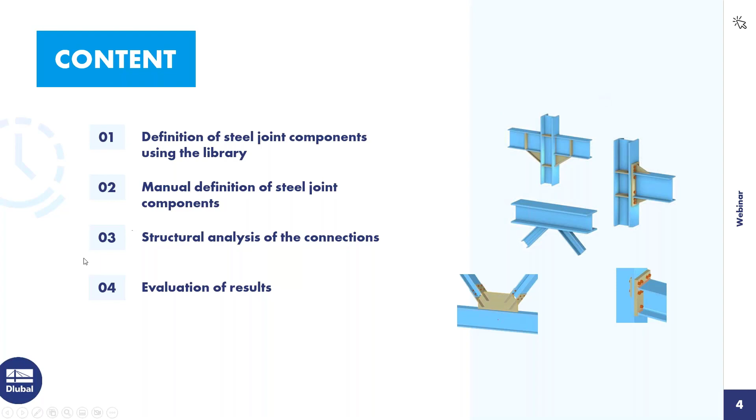Okay, then I turn to the program, RFEM 6. A simple model: a framework with frames in one direction and bracings in the X direction.

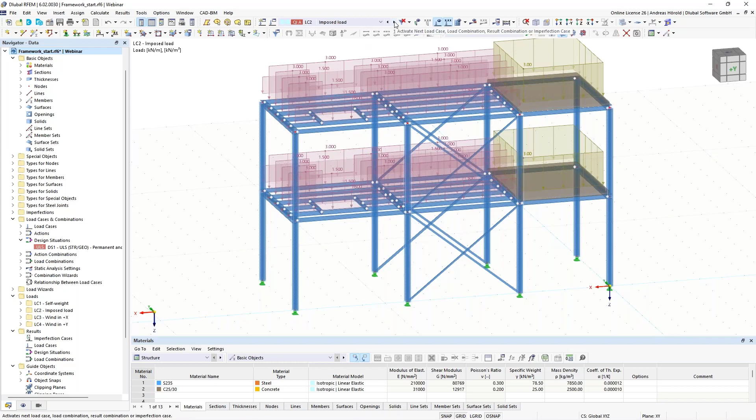We have got several load cases, for example the self-weight load case, the imposed load, and two wind load cases, one in X direction and one in Y direction. And we have got several combinations and a design situation.

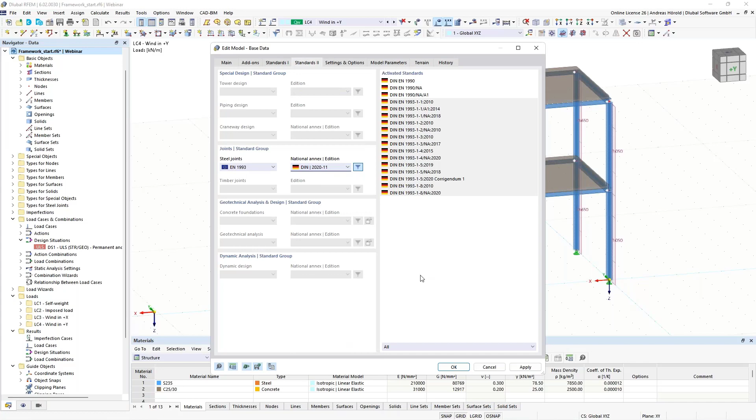So, to design the steel joints, I have to activate the add-on here, left above, under base data. I open the dialog, and under add-ons it's already activated—it's from my test. The standard is also already here for the load case classifications, the standard and national annex, in this case for Germany, for the steel joint design.

Then, once the add-on is activated, there are two new folders: the types for steel joints, for the creation of the steel joints, and at the bottom, the steel joints design, the design situations, and ultimate configurations. I will show you that component, the ultimate configuration, in the next dialog.

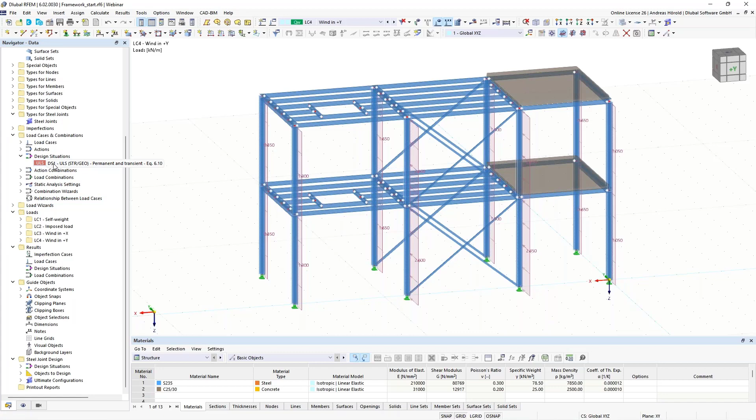But before I do that, I go to the design situations. You can see again the load cases here, the actions, and the design situation. It's important—if you activate the add-on, it's the default setting that the steel joints design is activated. Just note that it is here.

Okay, and then those are the action combinations and the load combinations, and those load combinations are included in the design situation. You can see that here in the overview.

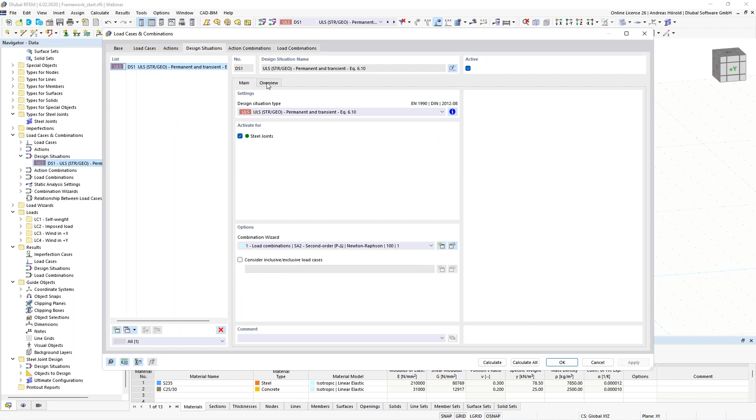Okay, so we can leave the dialog and start with the first steel joint. Maybe I can show you that in the model. I would like to use that node here, and I will define all connections for that node.

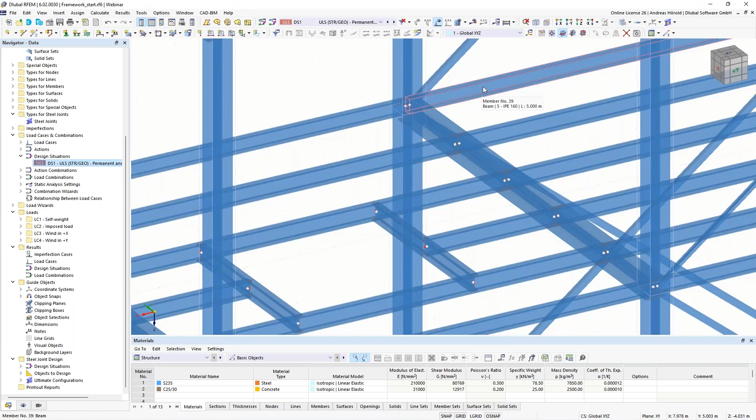The rigid connection of the steel frame and the pin connection or connections of the platform beams, and two connections for the bracings. Those are L sections.

Okay, let's start. Right click on steel joints on the left side in the navigator data, and I select new steel joint. First I select the joint, the node—Node 33, and I apply that.

There are 7 members that have got the end or the start point at that node. We can click through them: Member 1 is the platform beam, that's the bracing, the frame or the horizontal beam of the frame, the upper column, the lower column, the other platform beam, and the upper bracing.

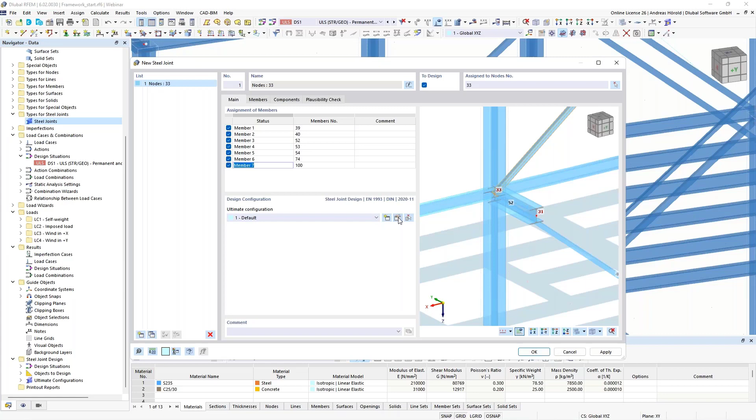Okay, here you can see the design configuration. I open it—you can perform a buckling analysis. Then you can see the standard settings here, the maximum number of iterations; you can increase that, for example. Then you can also increase the number of load increments.

That's the standard setting, limit plastic strain. That's the value from the standard. And so on. I leave all settings as they are, also the safety factors here.

If you want to perform a buckling analysis, you can go to that dialog. You can also increase the number of lowest eigenvalues, number of iterations. That's the limit load factor from the standard, it's 15 according to the Eurocode.

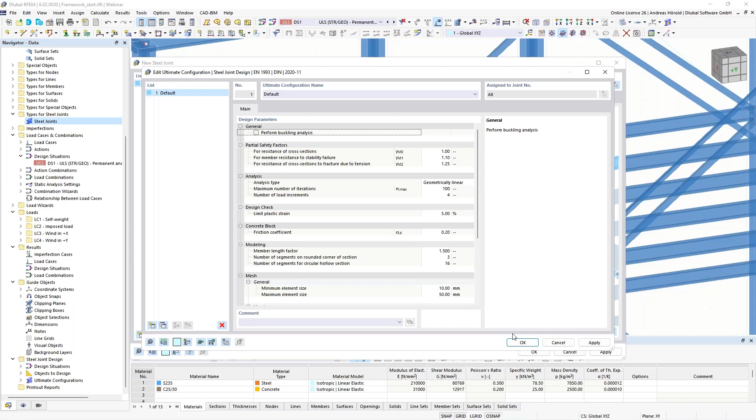And for that connection, I don't do a buckling analysis. Okay, then we go to the next dialog, members. The finite element analysis requires at least one member to be supported.

I select the lower column. The column is in reality supported here, and I will support at least this column. Okay, and we define also that the column is continuous. That's automatically overtaken for the two columns.

So the member settings, you can see here the member settings from RFEM: S235, and the sections, and we overtake the sections, of course.

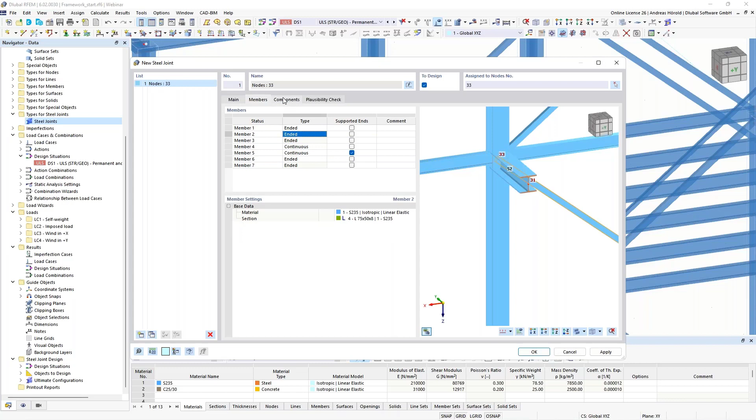So then under components, you can use the library and you can create single components. I open it. You can see four categories.

The modifications: member cut, plate cut, we will use both of them. Then the plate editor: plate, stiffener, haunch, and so on. Then under connection elements: end plate, fin plate. Under others: the auxiliary plane, a help plane, then the welds and the fasteners.

Yeah, that's the current state of that library. We will extend that library continuously. A team of eight members are working on the development of the add-on Steel Joints.

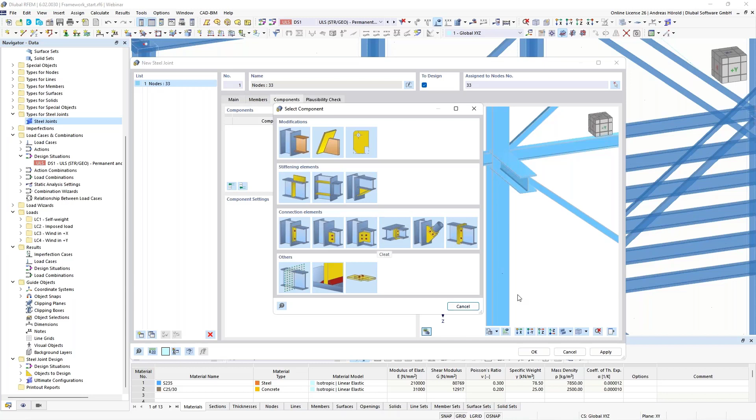We also extend the templates. I go to the template library. So there are also four general categories: the rigid connections, the pinned connections, truss, and the bracings.

I click through some examples: beam to beam, beam to column, with haunch, such a connection. If you download the trial version or you already bought the program, you can click through the single components. Maybe a cross joint.

Okay, I will show you some pinned connections: beam to beam with cleats, fin plate, short end plate, beam to column the same, cleats, fin plate, short end plate, and so on.

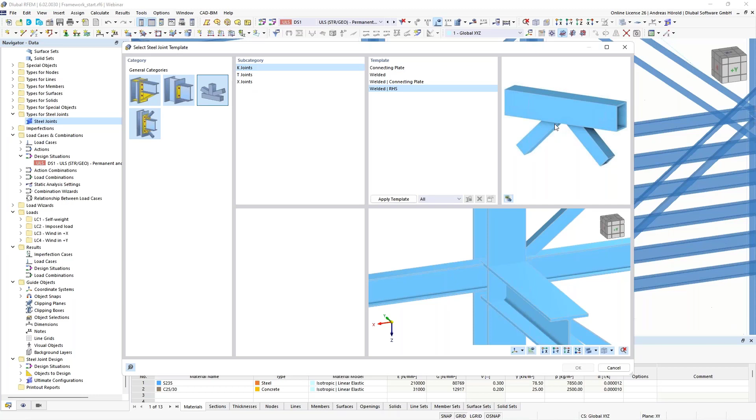Trusses, you can use that for diagonals or for bracings. The K joint, welded, such a connection. Also for bracings to use welded, it's quite new. The rectangular cross sections with a weld, T-joints, X-joints, and so on.

Then last but not least, the bracings. Similar connection, such a connection. Okay.

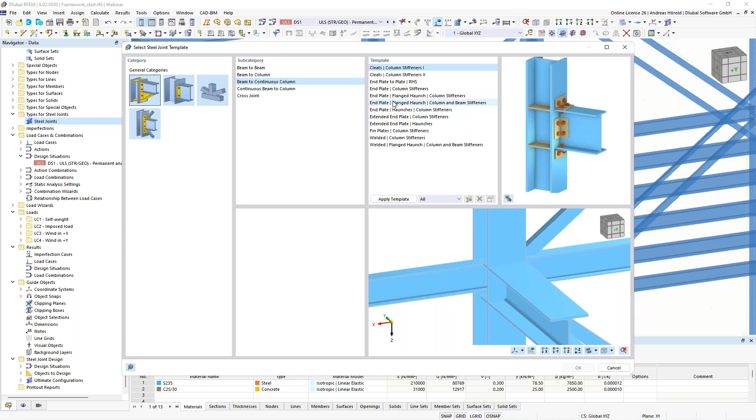But we will start with the first connection, the rigid connection. I use here the category rigid, beam to continuous column, and this one with a haunch and column stiffeners. If I apply the template, we will see it in the preview here right at the bottom.

And you can see we have to modify that connection. We leave the dialog with OK. And we go through the single components. So I extend the window a little bit.

Okay, so then we start with the end plate. Member 3 is okay, you can see member 3 is selected if it is chosen. Then the reference member is the column, you can see it's selected.

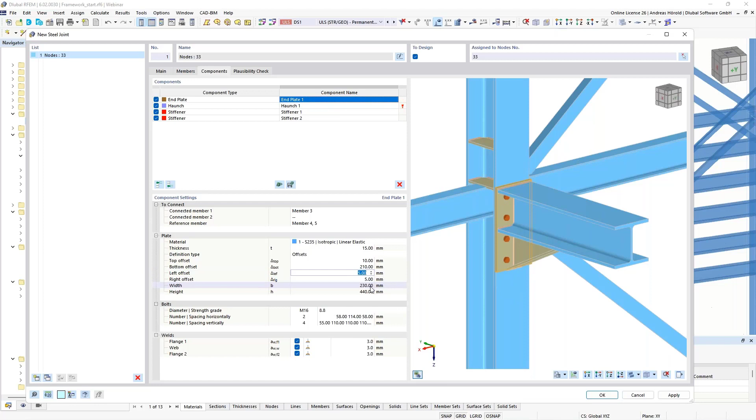We use a thickness of 15 millimeters, then 210 millimeters bottom offset. We don't need an offset, we say 0. Okay, on the other side also 0. The rest is quite okay.

So then the bolts, we use a diameter of 20 millimeters and a screw strength of 10.9. So then you can use our values here, it's quite okay for this connection.

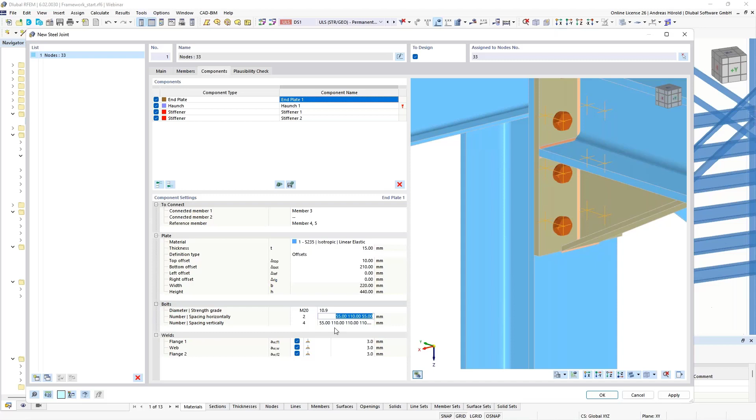I will only change the vertical spacings, I use only 3 bolts. Okay, and I only entered the first 3 values: 70, space, 95, space, 150, and the last dimension is calculated automatically.

Okay, then double fillet welds for the flange, 6 millimeters, then 4 millimeters, and also 6 millimeters.

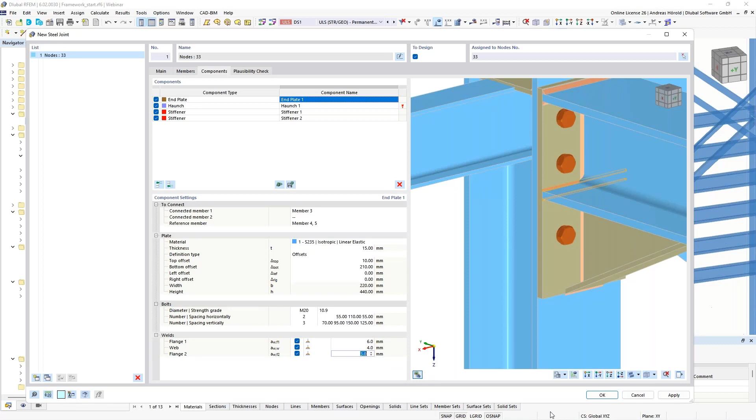Okay, now you can see we have to modify the haunch, that's the next step. So member number 3, that's okay.

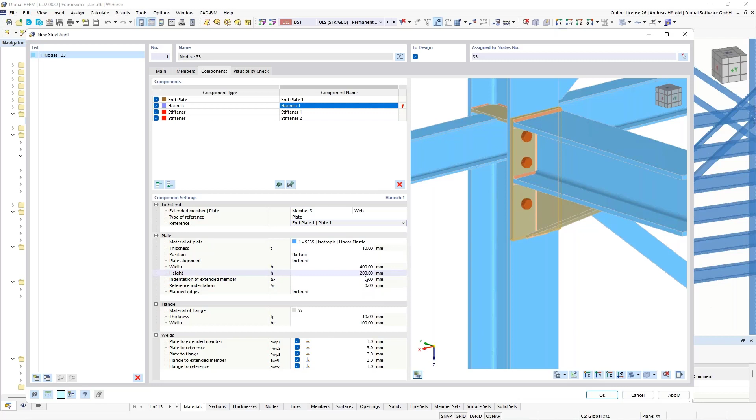So then the plate is also okay, and plate 1, that's okay. So the other values are also quite okay. I decrease that value. Okay, and you can see now it's okay.

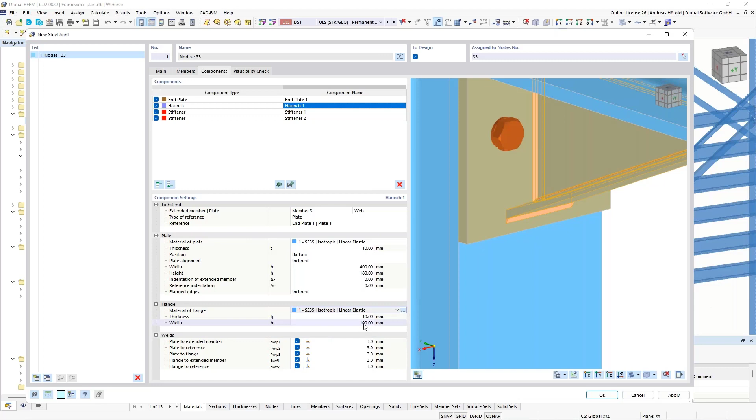So then I have to define a material for the flange, we use also the S235 steel. So then the width can be larger, 200 millimeters in that case. Okay.

So then the welds, that weld here, you can see it's selected, 4 millimeters, now we can leave the double fillet weld. Then this weld also, the double fillet weld, 4 millimeters.

Then plate to flange, this one, also 4 millimeters. So then the flange extended member.

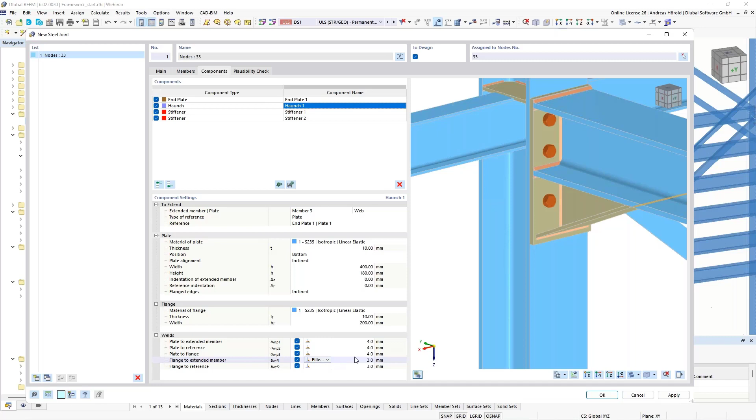Now this one, we use another weld, a butt weld on the rear side. And for this flange to the reference, this weld, we use a double fillet weld, 5 millimeters.

So the haunch is quite okay, but the stiffener not. So that stiffener should be quite okay. Let me check the values. Yeah, okay, I only define a weld of 4 millimeters. But we have to move the upper stiffener here.

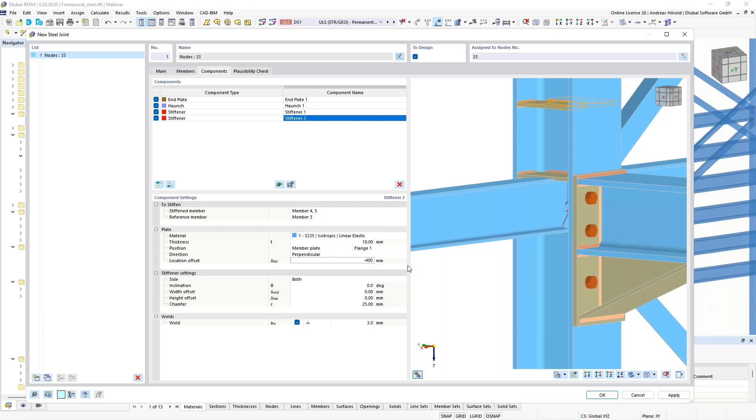So the value is minus 400. Okay, and I've also to change the weld. Okay, the rigid connection is finished.

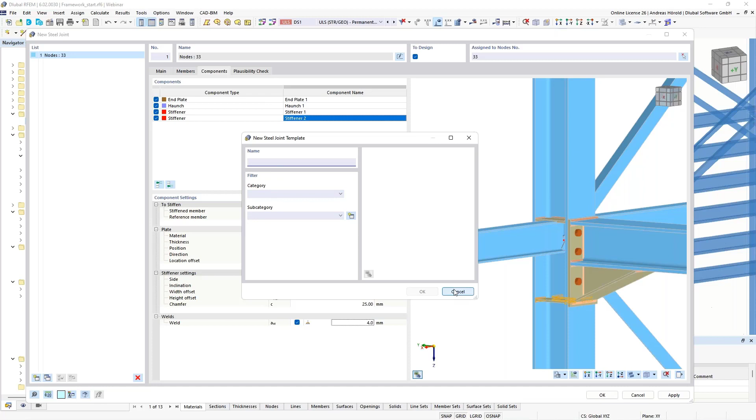And yeah, it would be possible to save it as a template, for example, to use it for the other rigid connections for the frame, for example, on the edges of the framework. And then you could press this button here, save component as template. You can give it a name, select the category and subcategory, and so on. Okay, I don't do that.

I continue with the connection of the platform beam, of that beam here. So that's why I use a component at the end, an end plate, this one, end plate.

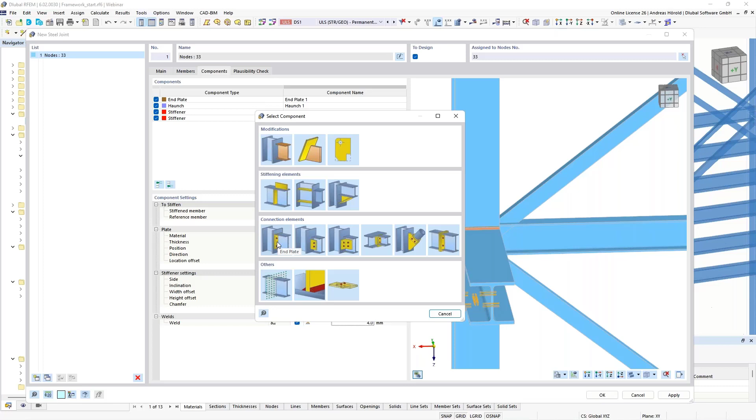So connected member is member 1, this one. And the reference or the other connected member is the member on the opposite side, member 6. And the reference member is the column, that's members 4 and 5.

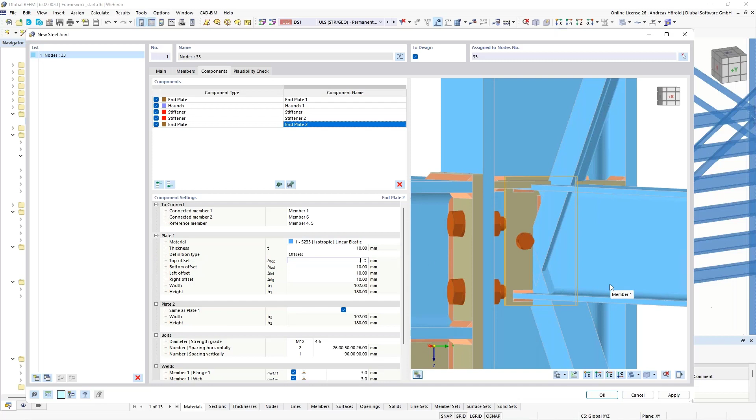Okay, now you can see the end plate. So same material. I decrease that value here. Now we don't want to connect the flanges. Also on the lower side, minus 20.

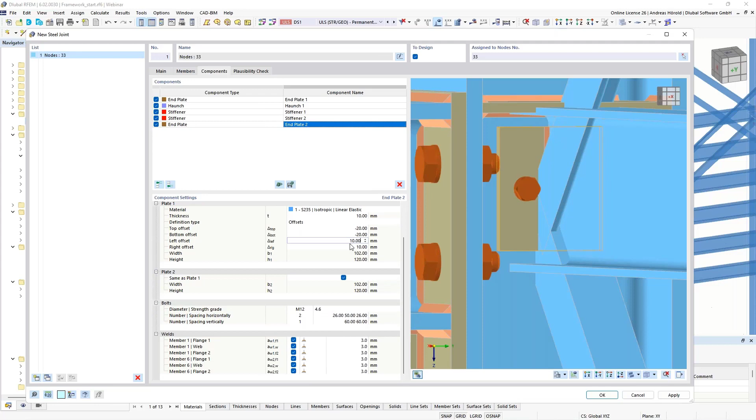Okay, the rest is quite okay. The opposite plate should be the same. It's on this side. Yeah, you can see it here.

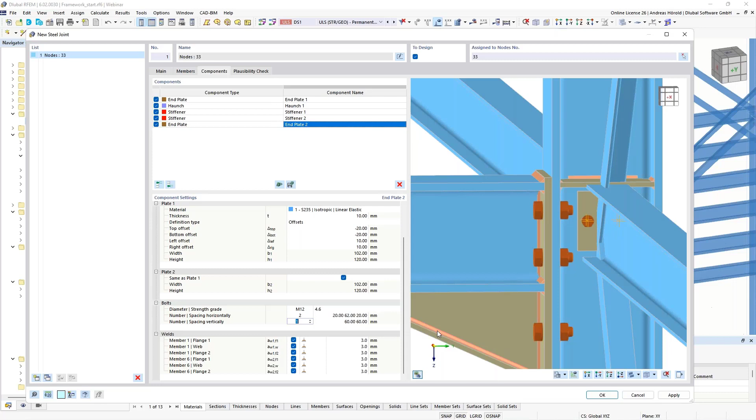So then bolts M12, it's okay. 4.6 as screw strength, it's also okay. Then I enter the value 20 and the rest is calculated automatically.

So then I use also 2 vertically and enter the value 35. That's good. So then we turn to the welds.

We don't connect the flanges. Yeah, that's why we deselect our flanges. Only the 2 webs should get a double fillet weld, and the value is 4 millimeters. Okay.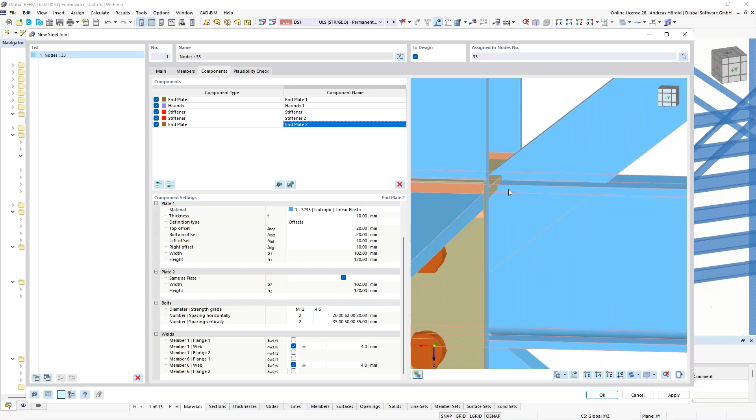So now the 2 end plates are finished. Not yet, sorry. We have to add a cut here. Yeah, it's in conflict with that plate here, with the plate of the rigid connection.

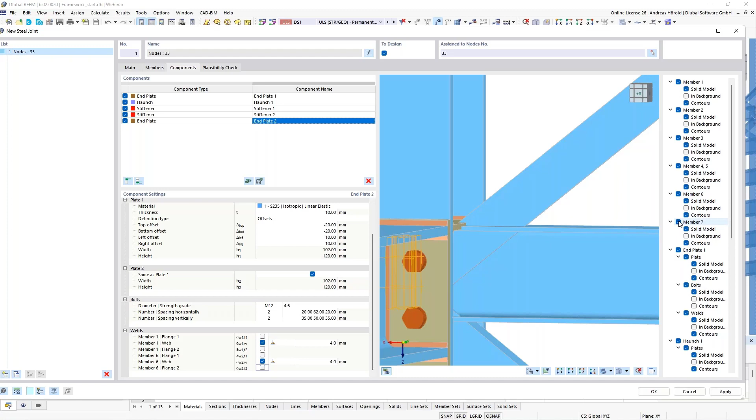To get a better overview, I use this button here, right at the bottom, and deselect member number 7. Okay. Now it's better to see, I think. So...

I add a member cut. Which member? Member 1, by plate. And cut via stiffener 1, plate 1, that one here. Okay.

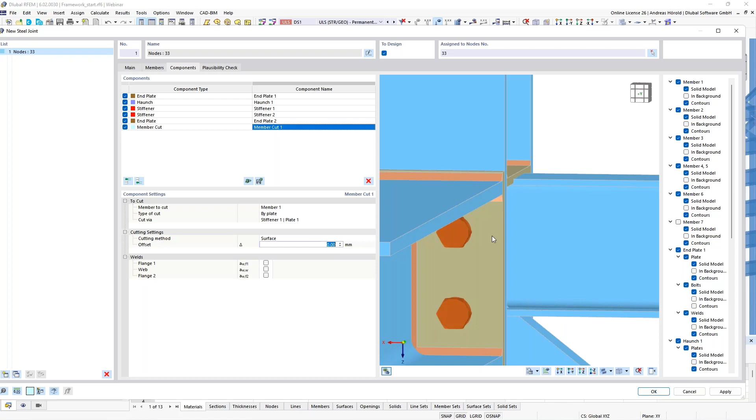So, surface with an offset of 15 millimeters. And now you can see the cut.

Okay, to have it on the opposite side, I can copy that. That's also a new feature. By right-click, I copy the components at the end, only this one component.

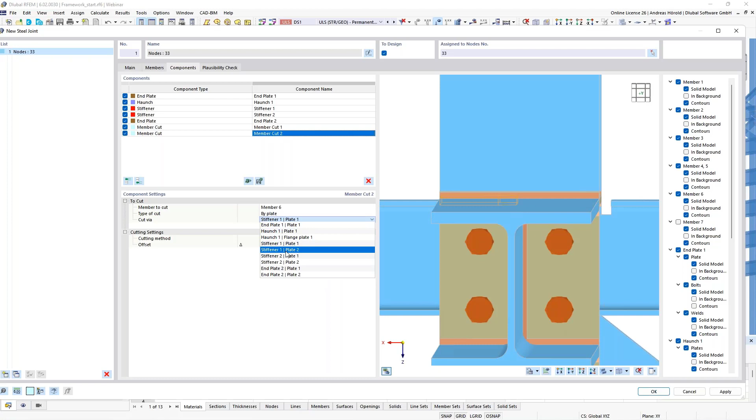And I have to define another member, in that case member number 6, the left side. And the cut is via stiffener 1, plate 2. So you can see it.

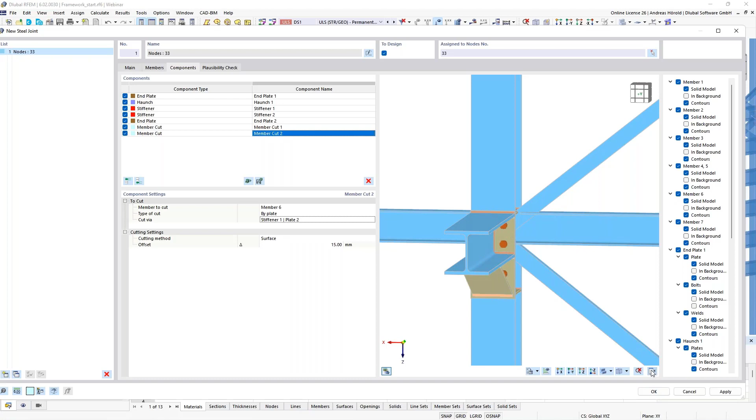So now the rigid connection is created and also the pinned connections, and we continue with the bracings. I select number 7. Okay, I can close it to have a better overview. So...

Yeah, since we haven't got this component that I want to use in the library, I have to create it with the single components. It's a little bit more complicated, but you can see now that it's very flexible. You can define almost all connections with the single components.

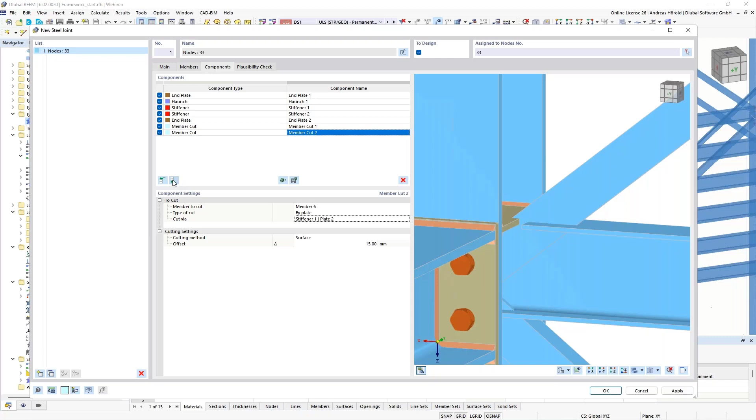So I start with a plate, stiffening elements, plate. So the material is S235 again. The thickness should be 8, then 250 and 170.

And the position should be a member plate. So, and that's the member number 7 and the leg 1. Now you can see it in the preview on the right side.

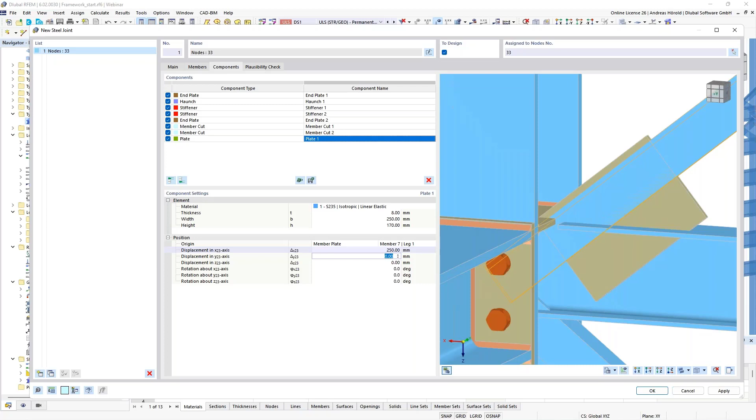Okay, but I have to move it a little bit. I use 250. Okay, and to have it on the side of the leg, I enter here minus 8. Yeah, that's the offset of 8 millimeters. Yeah, and you can see now it's not in the axis of the platform beam.

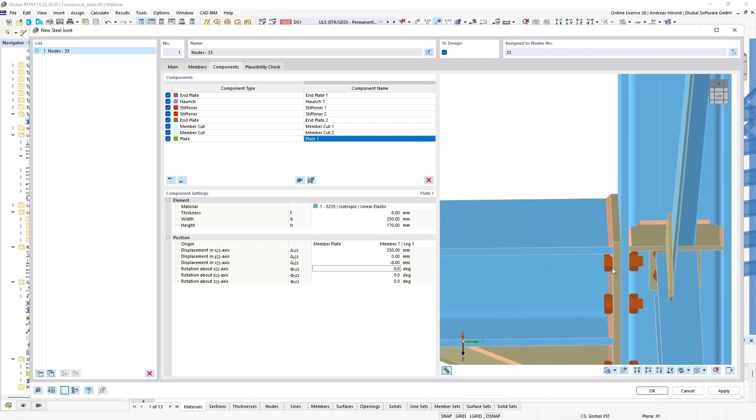Yeah, that's the difference between the static model and the connection model. Yeah, the axis of the L section is here, and the axis of the horizontal beam here, and the plate now has an offset.

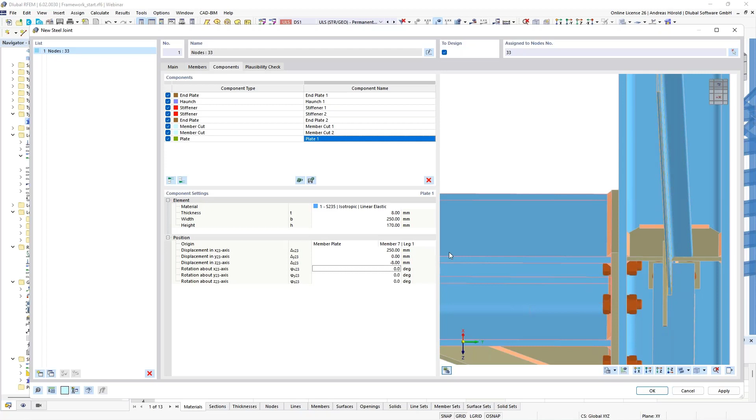Yeah, you can avoid that if you define an eccentricity for the bracing in the RFEM model, or you can ignore it for the steel joint design. I ignore it for the steel joint design. It's up to you how to use it. That's the difference between the axis model in RFEM and the detailed connection model.

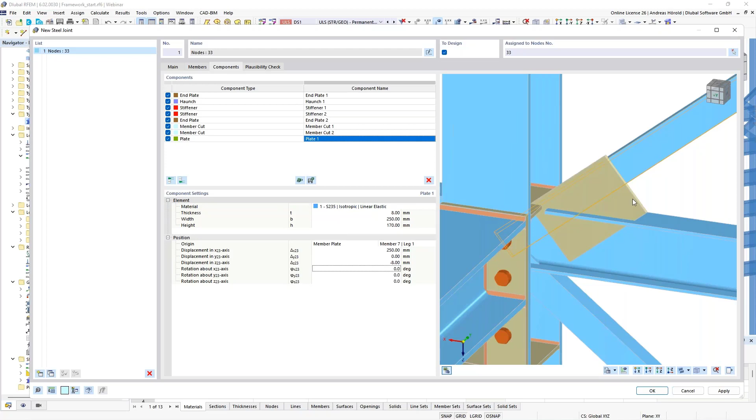Okay, the plate is not finished. We have to enter cuts. I enter this plate cut. The plate is number 1, by member plate.

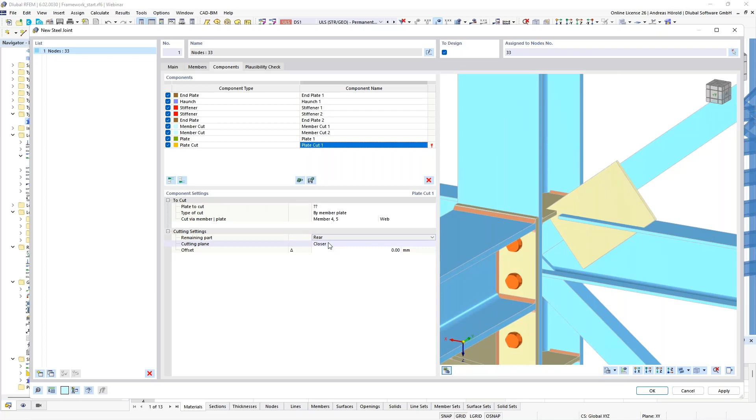Cut via, I select the column, and the web of the column should be the reference point. Okay, the rear side, closer end is the cutting plane. So we can do it step by step.

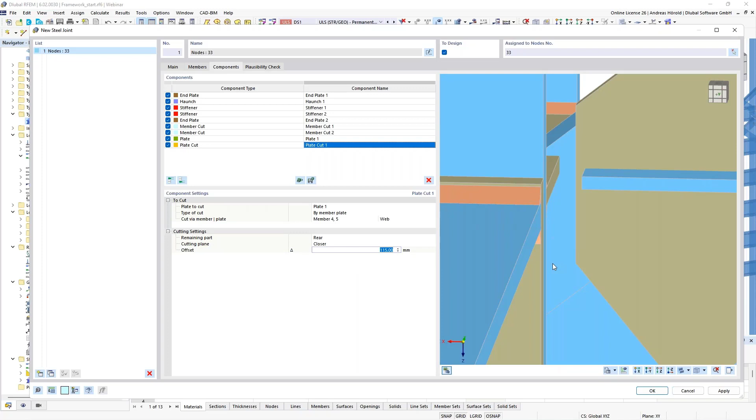No, that doesn't take the plate number 1. Okay, you can do it step by step, or calculate which is the right place. I would like to have the plate cut here at the end of the member cut, and that's 120.25.

Okay, this cut is quite okay. We enter a new cut.

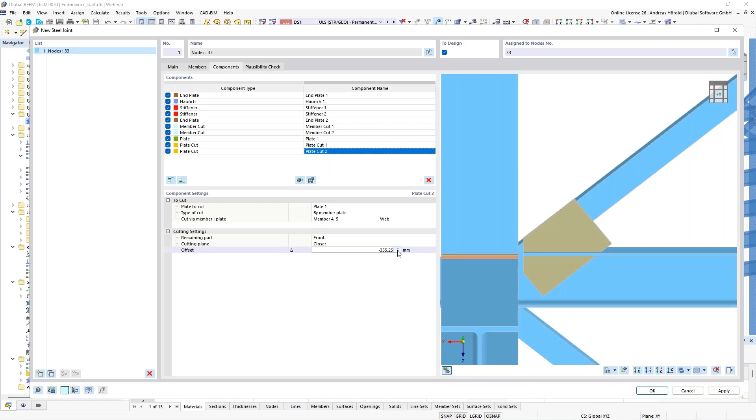So again, plate number 1. By member plate, that's the same again. Member 4 and 5, and the web. That's the reference point. Front, the closer end, and I enter minus 335.25. Okay, only one cut is missing.

Plate cut. Again, plate 1. So now by member plate. And this time member number 1. You can see it's selected. And the upper flange, flange 1. Okay, the rear side. Yeah, and that's all. I only have to enter a double fillet weld of 4 millimeters.

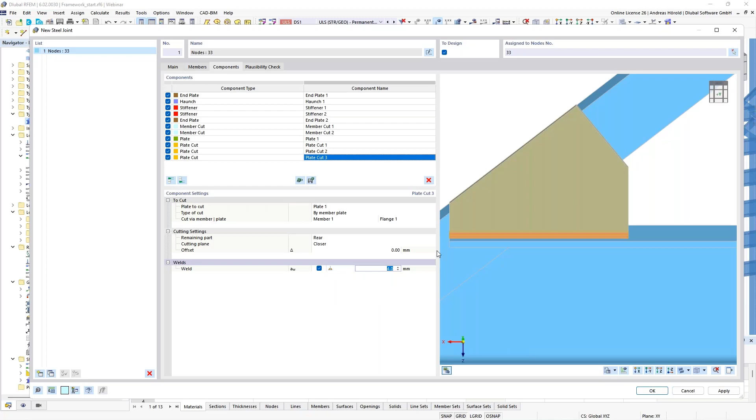So now we have to cut the member. Now you can see it's in conflict with the other parts of the connection. So I enter the next component.

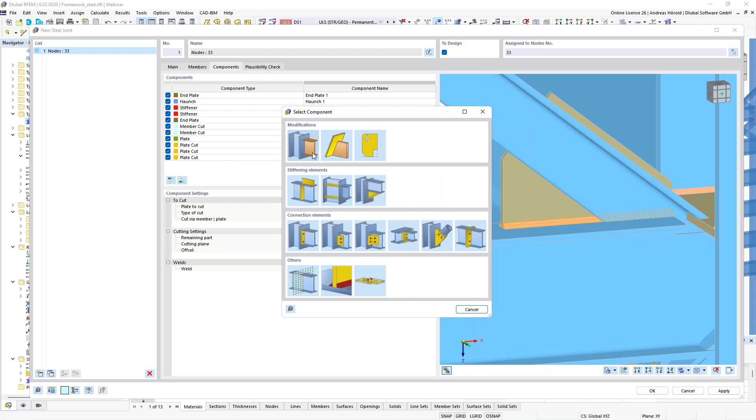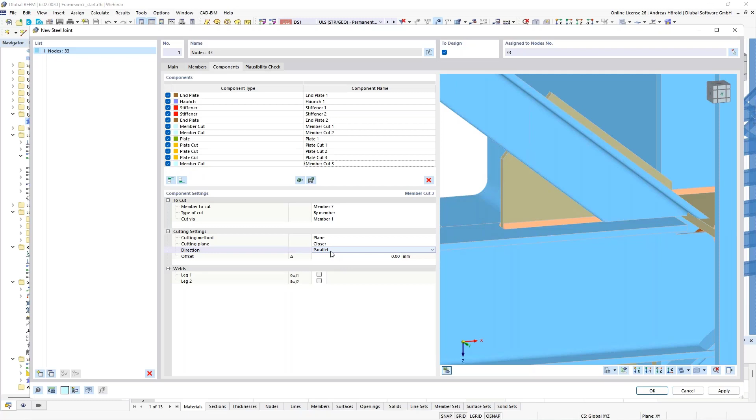Here left above, a member cut. The bracing is the member number 7. By member number 1, that's the platform beam, the horizontal beam. Then it shouldn't be parallel, but perpendicular. And a small offset. Okay.

So now we have to define the bolts, means fasteners. I add the component fastener. The component is member plate, member 7, leg 1. The other component is the plate number 1. So that's okay.

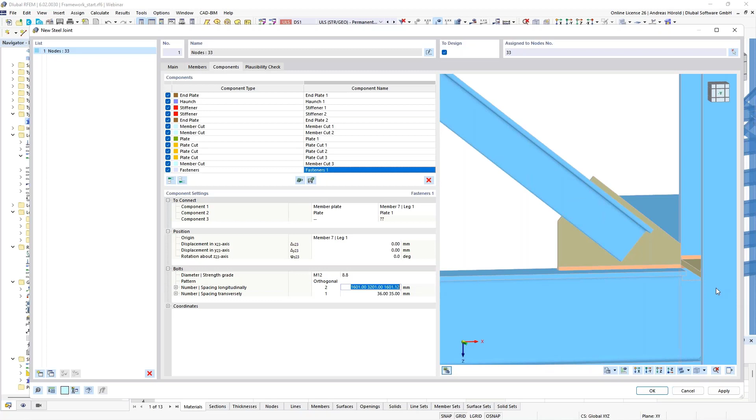M12, I use another screw strength. You can decide by yourself. I, for example, use 8.8 this time. So, and that's the distance from the crossing here: 300, then space, and the distance between the screws or bolts should be 40. And that's all.

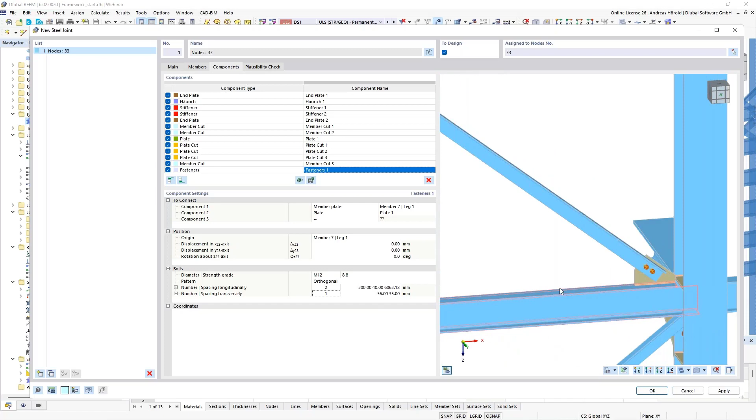And now the connection for the upper bracing is finished. For the lower bracing, we use the same function. I copy that. So I copy the last 6 components. I select all, then I do right click, and copy components at end. So now it's the same connection, and I have to modify it.

So that's plate number 2. I start with plate number 2. So I only define here another value, member plate, but this time another member. The member number 2, the lower bracing, and leg 1. I hope you can see that it is selected. Okay, then those values are almost okay. 90. Okay.

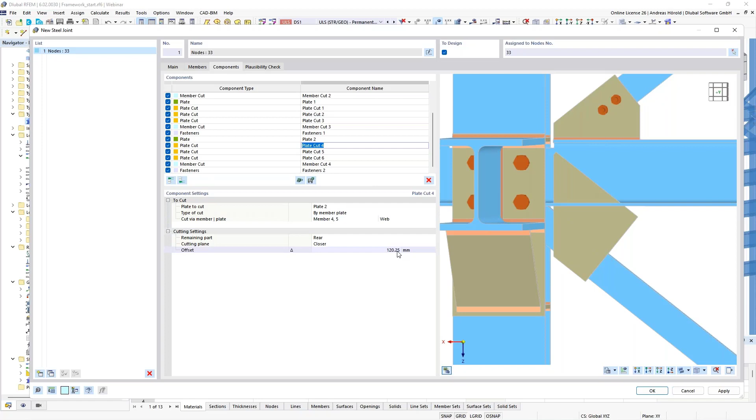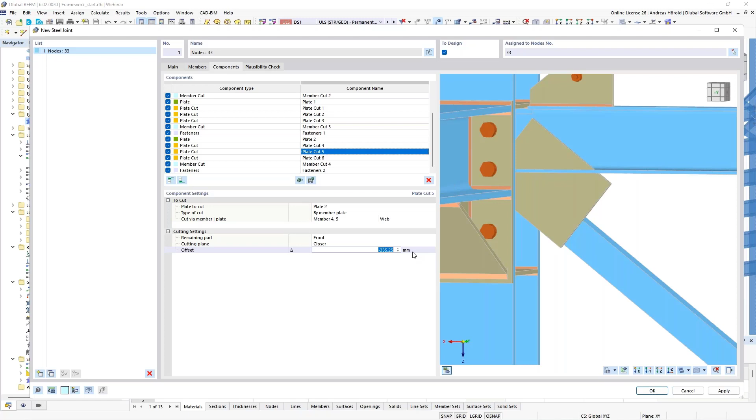So then plate cut 4. I use another value. Yeah, you can see the 45 millimeters are okay for this connection here. Plate cut 5. That's also okay. Minus 265.

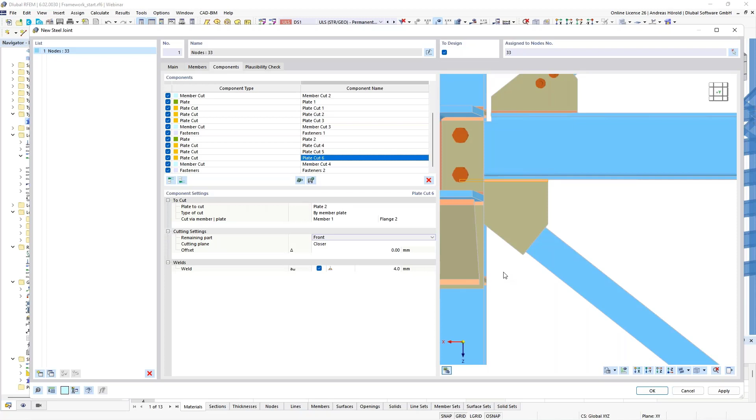And only this plate cut here, the flange is missing. Flange number 2, the lower flange. Then the front side. Well, and that's all. So then the member cut, I rotate it a little bit, but you can see all. This time member 2. Yeah, and that's all.

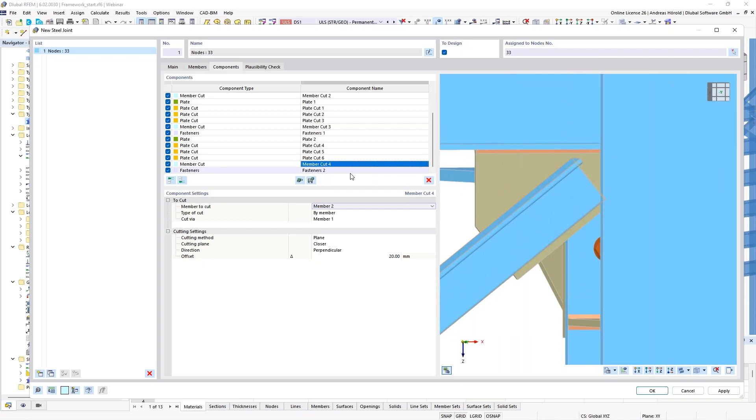Only the fasteners need to be modified. Member 2, leg 1. So, and 200 space 40, and that's okay.

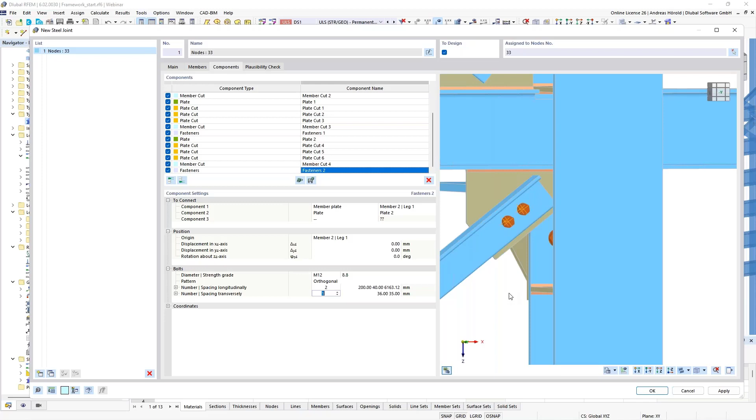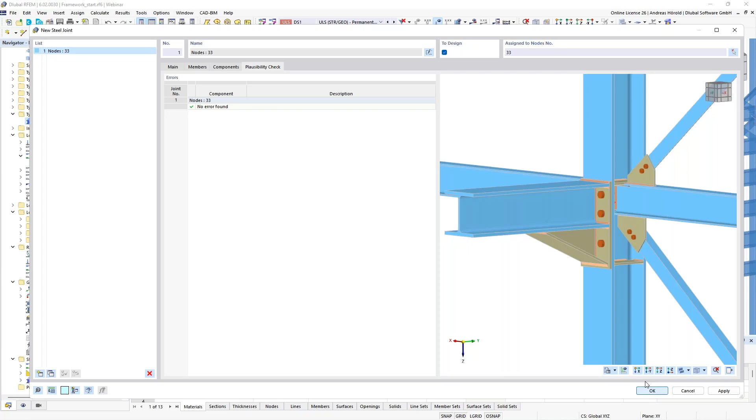So you can take a look if everything is okay, and you can do a plausibility check. Yeah, no errors found. Now that's quite good. Okay, I leave the dialog, and you can see the connection in the preview. If this button here right above is activated, you can also activate no joint model or simplified joint model.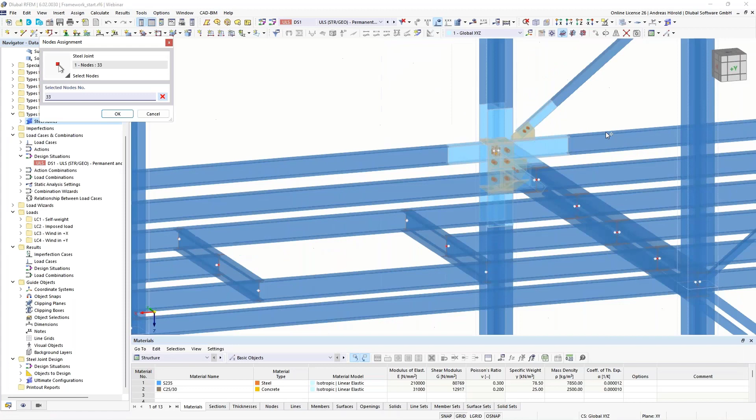Now I will use that. So, and now I can also use that connection for the other 3 nodes here. So I can, for example, open the dialog by double click on the connection, and I can select the other 3 nodes. Okay, so I apply it. And now we have got 4 connections, 4 similar connections.

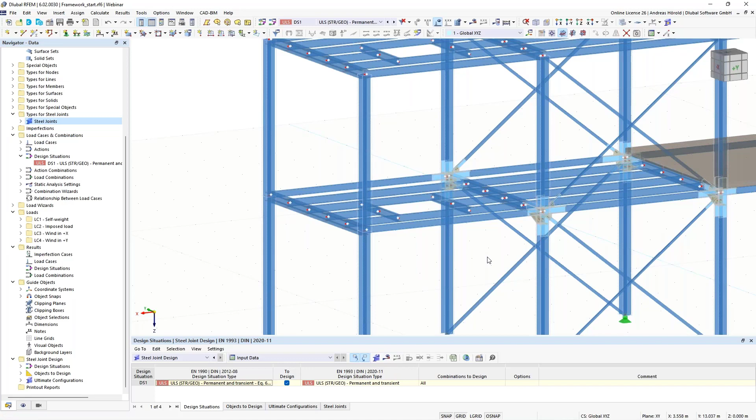So then we can open in the table here the steel joint design. And if I press that button here, the calculations would start. I skip the calculation. Yeah, the calculation time is about 15 minutes on my computer. I skip the calculation time and I open the calculated model.

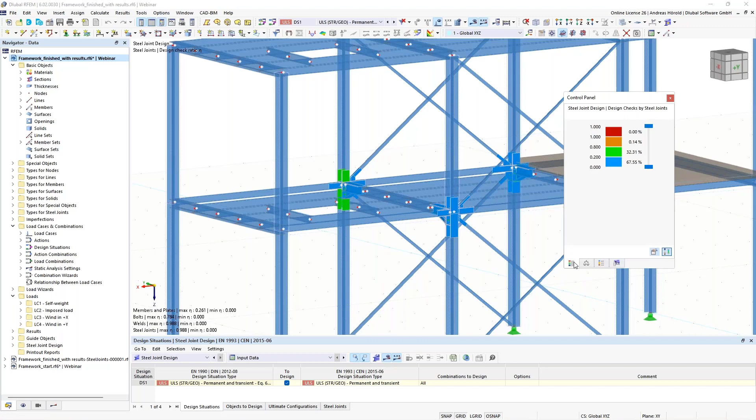I open the panel, and you can see the ratios here graphically. That's the connection with the highest ratios.

I go through the table, steel joints, stress strain analysis. You can see the design ratio by design situations, by loading, by joint, by node, by components.

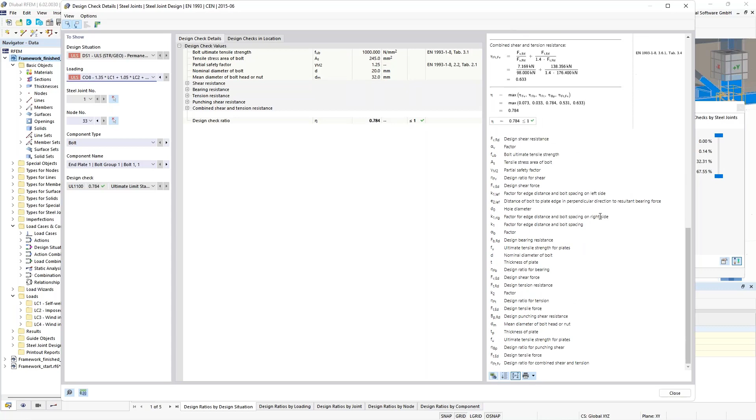If you go, for example, in that line here and open the design check details, you can see all formulas from the standard for the bolts, and where to find the formulas in the standards. You can also switch between the designs here, plate, weld, the welded design, and so on.

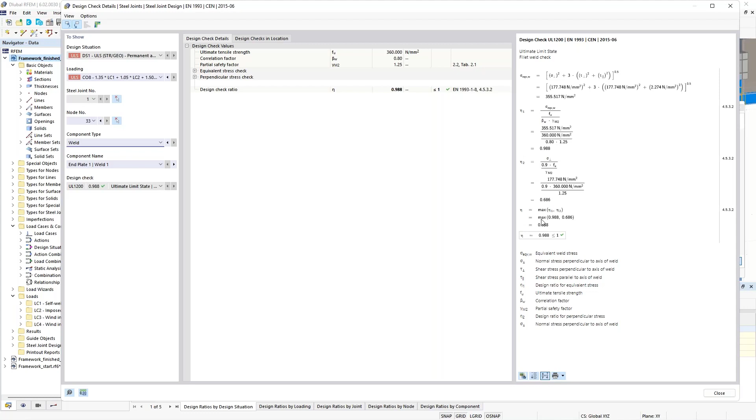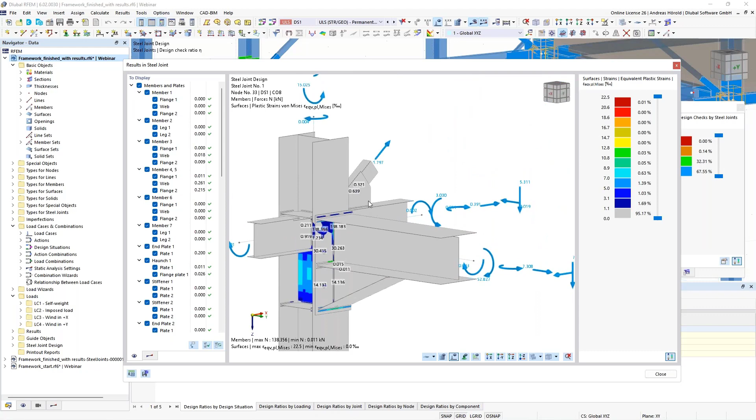Then when you click that button, the results in steel joints, you can see the detailed model. So it's the whole connection. You can see the ratios here graphically.

The gray area is a new feature for values that are not of interest, for example very small values. You can click through the single components, deselect, for example, the members and plates. Now we see, for example, here the welds and the maximum design ratios. And you can go through all.

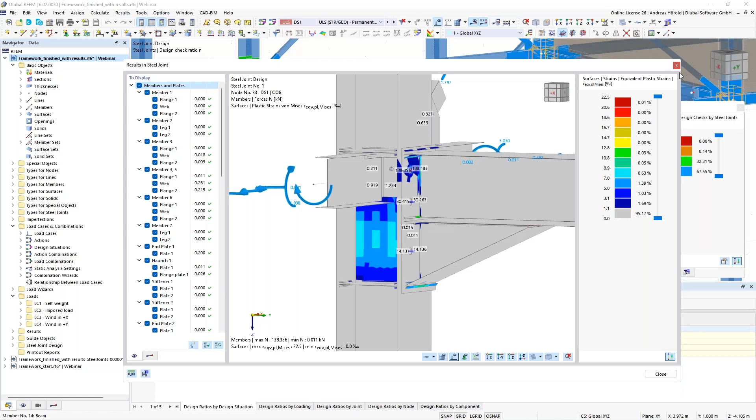Then you can save that submodel with that button at the bottom left, and open it. And that's the submodel.

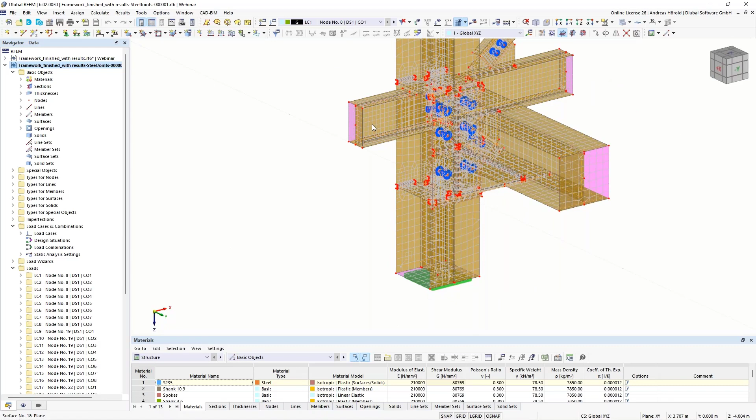With surfaces, the supporting of the column, horizontal beams as surfaces, the bolts, the welds. You can see a simplified model with surfaces and rigid links here.

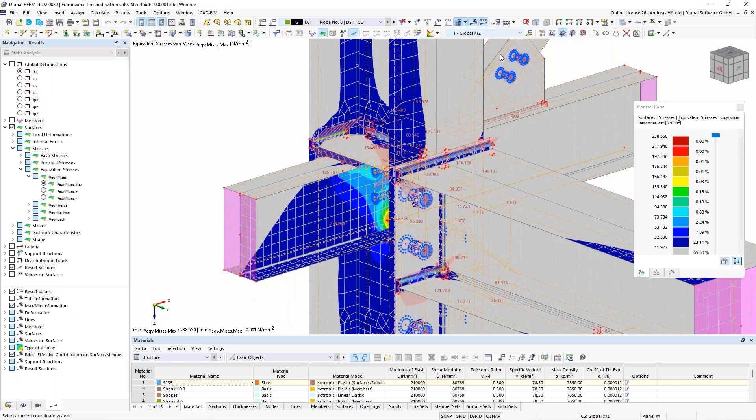Then we can also take a look at the results on the surfaces, for example here surfaces equivalent stresses, the sigma max Mises. You can add dimensions here and print it in the printout report.

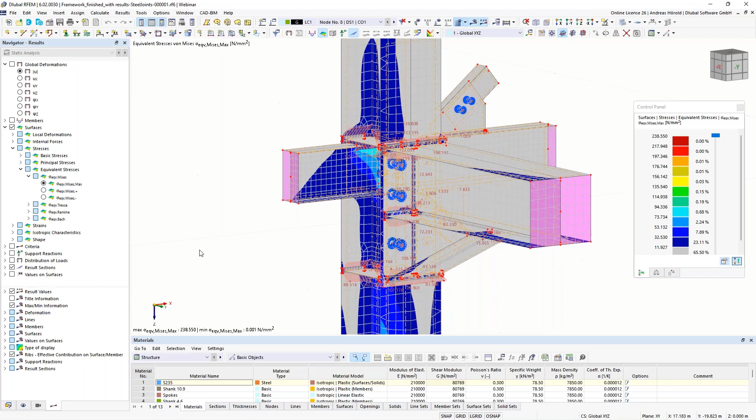Did I forget anything? Well, I think no. That should be all to this connection. I switch to another RFEM window with other connections that we already prepared.